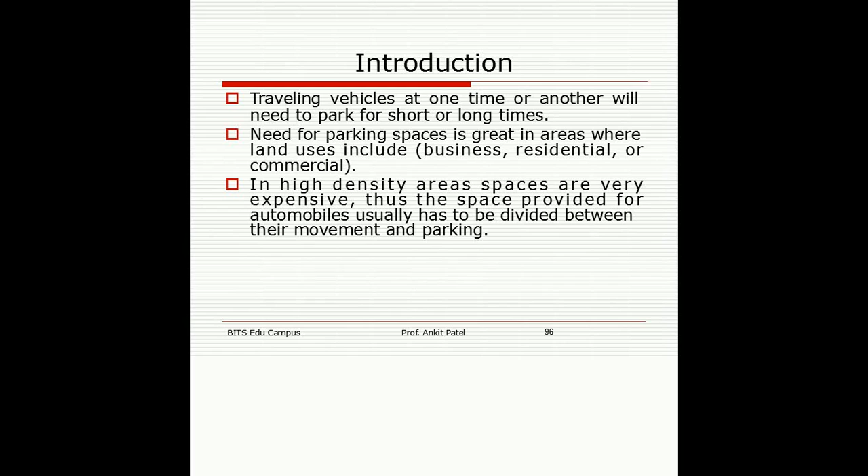Traveling vehicles at one time or another will need to park for short or long times. Need for parking spaces is great in areas where land uses include business, residential, or commercial. In high density areas, spaces are very expensive, thus, the space provided for automobiles usually has to be divided between their movement and parking.

Effects of parking are congestion, accidents, obstruction to firefighting operations, and effect on environment. Ill effect of parking: the congestion. Parking takes considerable street space leading to the lowering of the road capacity. Hence, speed will be reduced, journey time and delay will also subsequently increase. The operational cost of the vehicle increases, leading to great economical loss to the community.

Accidents: careless maneuvering of parking and unparking leads to accidents which are referred to as parking accidents. Common types of parking accidents occur while driving out a car from the parking area, careless opening of the doors of parked cars, and while bringing in the vehicle to the parking lot for parking.

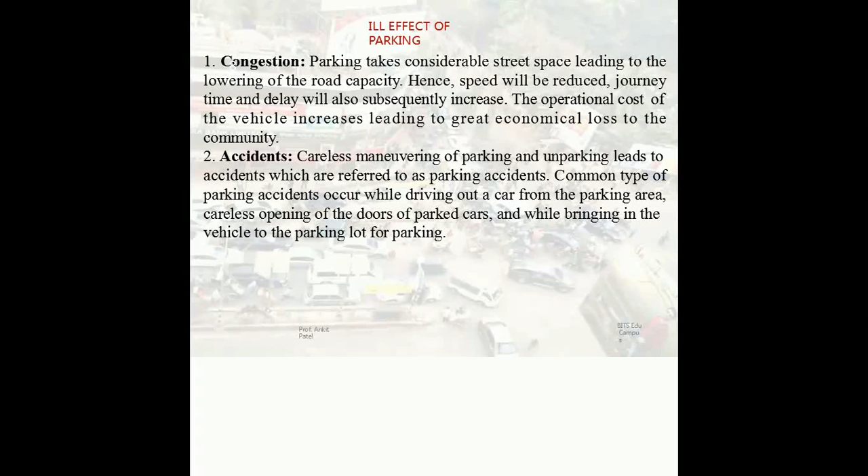Then environmental pollution. They also cause pollution to the environment because stopping and starting of vehicles while parking and unparking results in noise and fumes. They also affect the aesthetic beauty of the buildings because cars parked at every available space create a feeling that the building rises from a plinth of cars.

Obstruction to firefighting operations. Parked vehicles may obstruct the movement of firefighting vehicles. Sometimes they block access to hydrants and access to buildings.

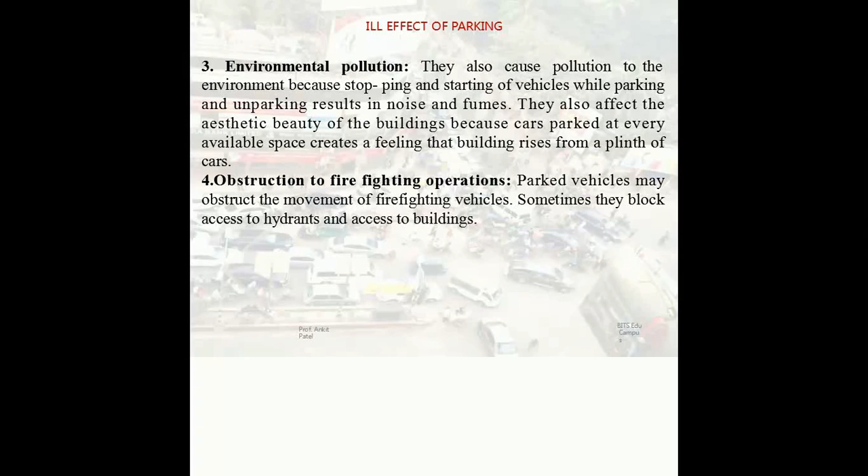General terms of parking facilities. Parking accumulation: the total number of vehicles parked in an area at a specified moment. Parking volume: the number of vehicles parked in a particular area over a given period of time. It is usually measured in vehicles per day. This does not account for repetition of vehicles. The actual volume of vehicles entered in the area is recorded.

Parking load. Parking load gives the area under the accumulation curve. It can also be obtained by simply multiplying the number of vehicles occupying the parking area at each time interval with the time interval. It is expressed as vehicle hours. Then parking duration: the length of time spent in a parking space. Parking turnover: it is the ratio of number of vehicles parked in a duration to the number of parking bays available. This can be expressed as number of vehicles per bay per time duration.

Parking systems are of two types, on-street parking and off-street parking. First of all, to see the on-street parking. On-street parking means the vehicles are parked on the sides of the street itself. This will usually be controlled by government agencies. Common types of on-street parking are as listed below. This classification is based on the angle at which the vehicles are parked with respect to the road alignment. As per IRC, Indian Roads Congress, the standard dimensions of a car are taken as 5 by 2.5 meters, and that for a truck is 3.75 by 7.5 meters.

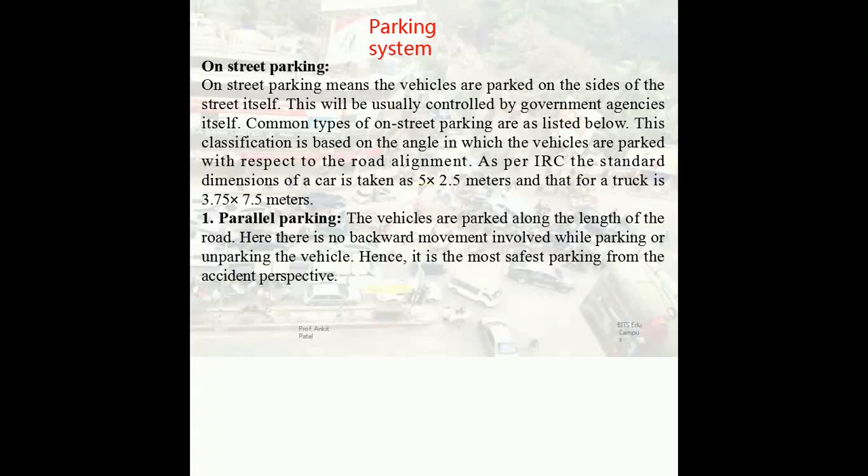Second is the 30-degree parking. In 30-degree parking, the vehicles are parked at 30 degrees with respect to the road alignment. In this case, more vehicles can be parked compared to parallel parking. Delay caused to the traffic is also minimum in this type of parking. Then 45-degree parking. As the angle of parking increases, more vehicles can be parked. Hence, compared to parallel parking and 30-degree parking, more vehicles can be accommodated in this type of parking.

Then 60-degree parking: the vehicles are parked at 60 degrees to the direction of the road. More vehicles can be accommodated in this parking type. Then right angle parking, also called 90-degree parking. In right angle parking, the vehicles are parked perpendicular to the direction of the road. Although it consumes maximum width, the curb length required for each is very little. In this type of parking, the vehicles need complex maneuvering, and this may cause severe accidents. This arrangement causes obstruction to the road traffic, particularly if the road width is less.

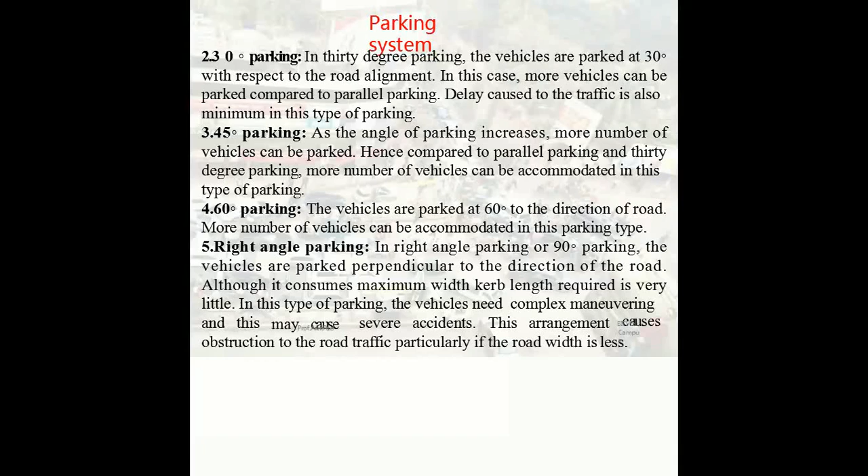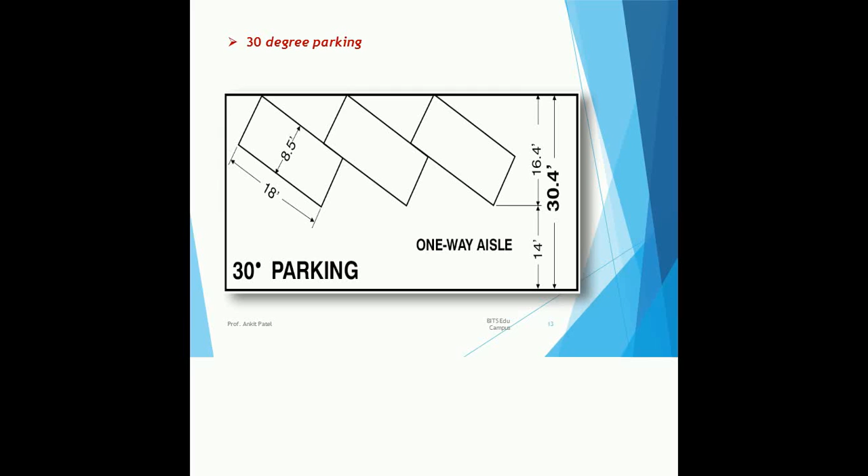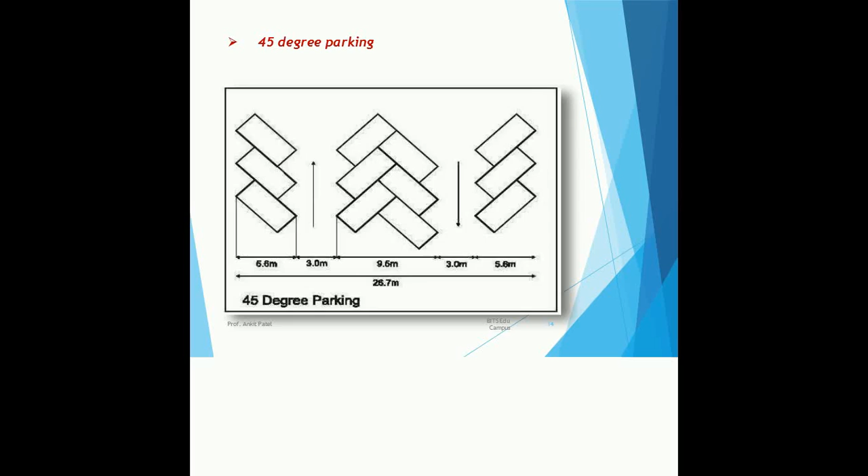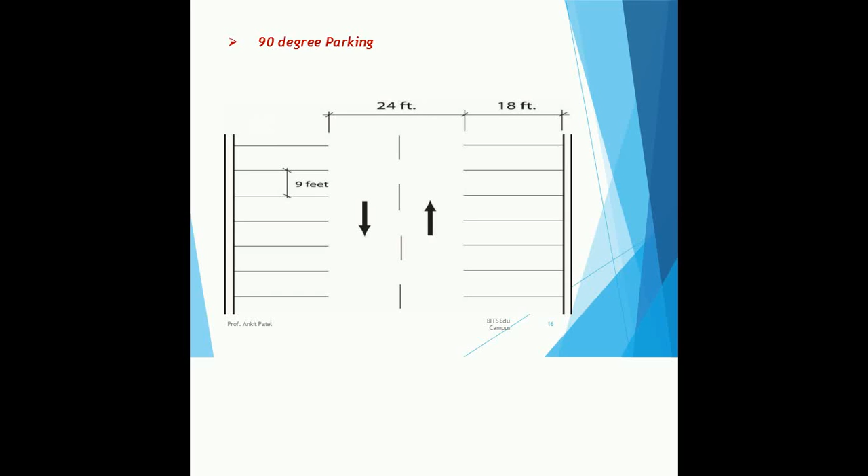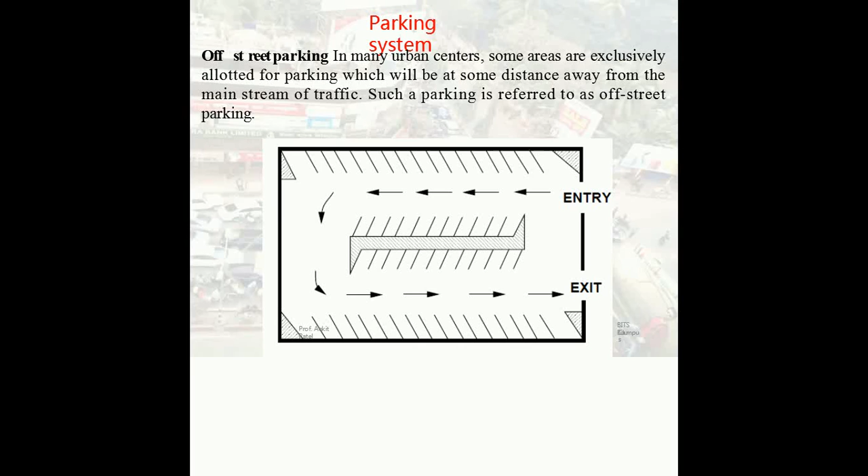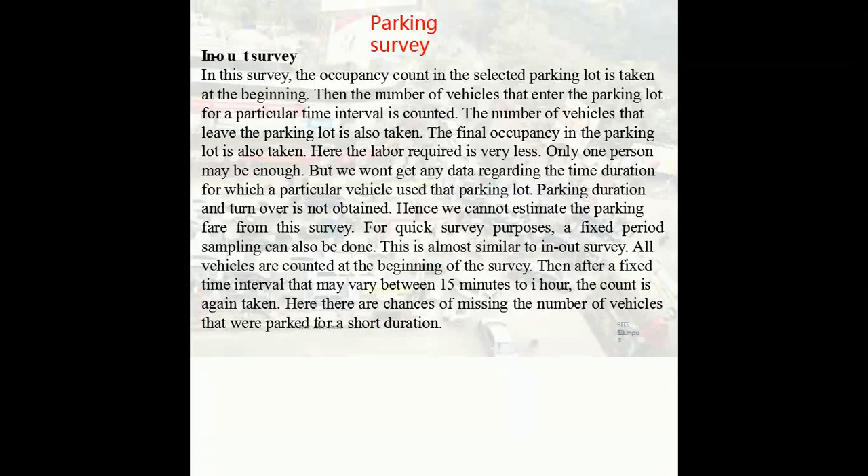For quick survey purposes, a fixed period sampling can also be done. This is almost similar to the in-out survey. All vehicles are counted at the beginning of the survey, then after a fixed time interval that may vary between 15 minutes to 1 hour, the count is again taken. Here there are chances of missing the vehicles that were parked for a short duration.

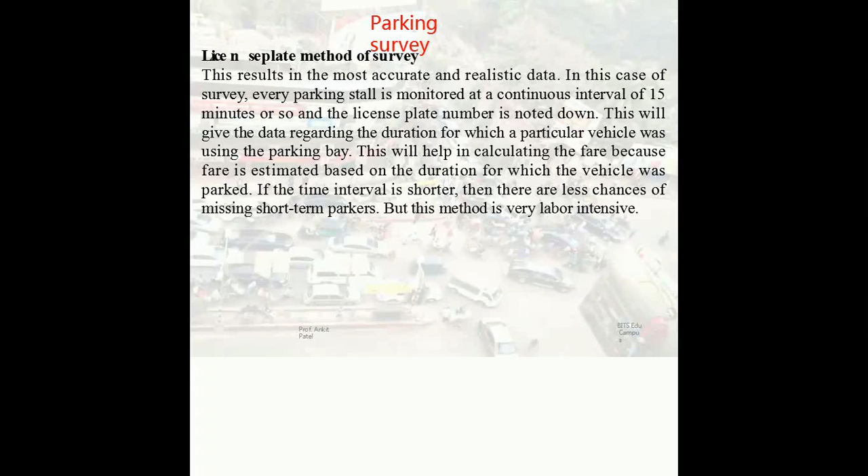License plate method of survey. This results in the most accurate and realistic data. In this survey, every parking stall is monitored at a continuous interval of 15 minutes or so, and the license plate number is noted down. This will give the data regarding the duration for which a particular vehicle was using the parking bay. This will help in calculating the fare, because fare is estimated based on the duration for which the vehicle was parked. If the time interval is shorter, then there are less chances of missing short-term parkers, but this method is very labor intensive. Thank you for listening.